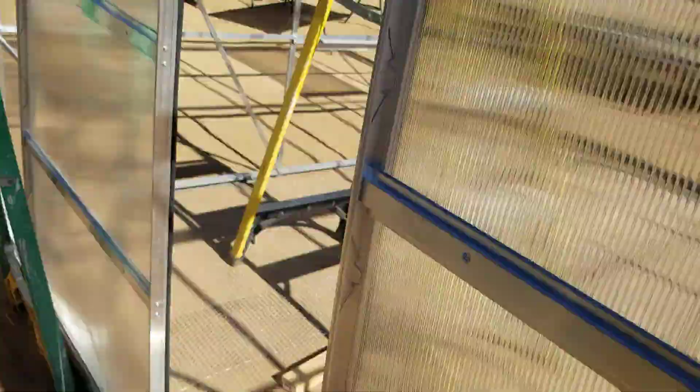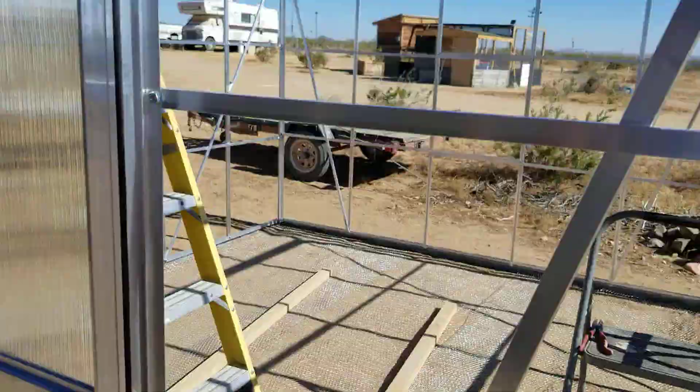Yeah, the doors are in, and they're not bad little doors, as you can see. They have rollers at the top, and plastic guides at the bottom. But with the blowing dirt and dust, I'll have to make sure I keep those tracks clean down there. You can see they're already filling up with dirt and sand, and that will cause the little plastic things to wear.

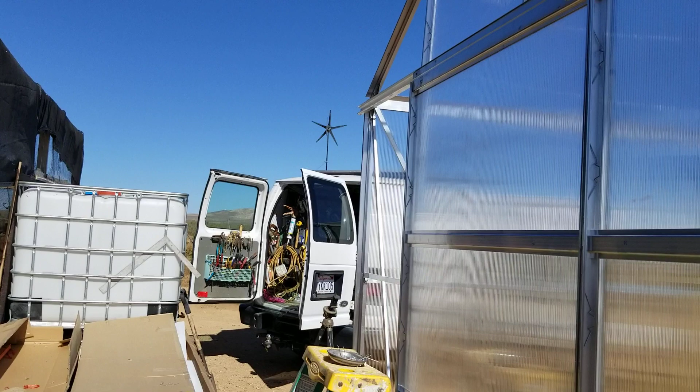So anyway, yeah, I got those in up there, and I'm going to be doing the other side in a little while. The wind just came up, but it's not that bad. It was a little stronger earlier, and I brought my windproof mic out just in case. But then I realized I'm not going to be able to use that when I put this in the holder over there and on the tripod.

But yeah, something got under the wire here and has been doing a bunch of trenching under there. I'm not sure if that was a lizard. It looks like it's probably a lizard because there's no holes that go down into the ground. So I think it's a lizard that's been going under there doing its little tracking through there.

What I'm going to be doing on the next Home Depot run is pick up some Portland cement and mix that with desert soil in a dry mix. Then I'll spread it out here like concrete, give it a light sprinkling with water, and let it set up so it's a really hard floor. It should still be somewhat porous to allow water through, just not easy for critters to dig through.

I hope this wind isn't bothering you. I'm going to move around to the other side, and we're going to get into how to install those little clips.

And they give you loads of them. This is one bag, and that's the other bag there. So we'll do this in a second.

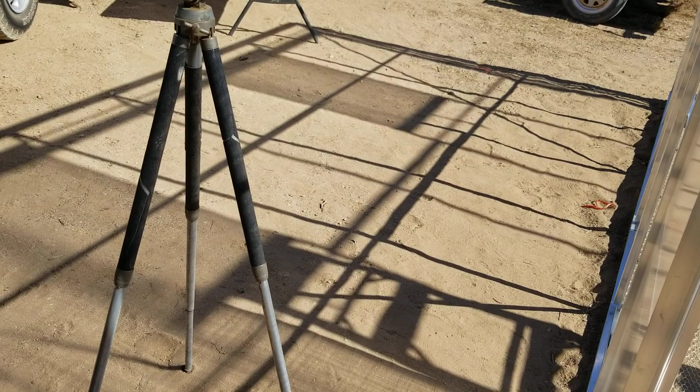I just have one question for everybody out there. I went to my local store here to get some ice and some groceries, and every local store I've seen has signs up saying, due to a national coin shortage, please try to use exact change. Can anybody explain how the COVID virus created a national coin shortage? You'd think with more people staying home and shopping online, things like that, where's the coin shortage coming from? Just curious.

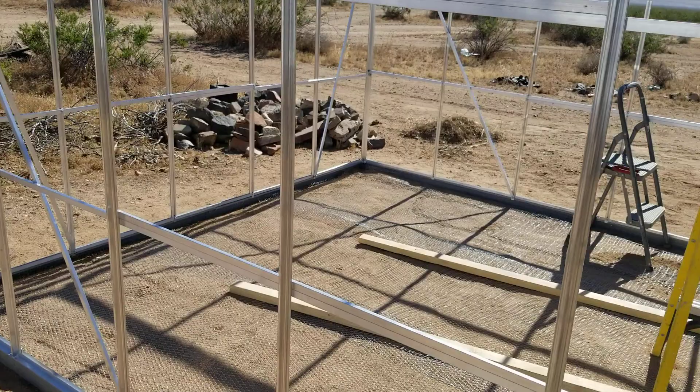Anyway, let me check my list before I go into this next step. Oh yeah, in the booklet, when I started constructing this thing, it says 2 or more people are required for setting this up. Well, there's 3 of us, me, myself, and I, and we got it done.

Remember, I work smart, not hard. So when it came to putting up the top beam, it was pretty easy to figure out. I raised it up and rested it on top of the solid side, the side that doesn't wave too much. Then I was able to go up the ladder on the other side and put one bolt in to hold it, then come back across and put a bolt in on this side, and two bolts on that side, and that took care of it.

One thing in the book that's wrong: it says after you put up the ridge beam, put end caps on it. Don't put the end caps on. I didn't, because it didn't sound right at that point, since those little vent doors have to slide into that top rail, and the top hinge slides in a rail. If you have the end caps on, you have to take them off again to slide those things in. So end caps and things like that are all pretty stuff, you can save that for last.

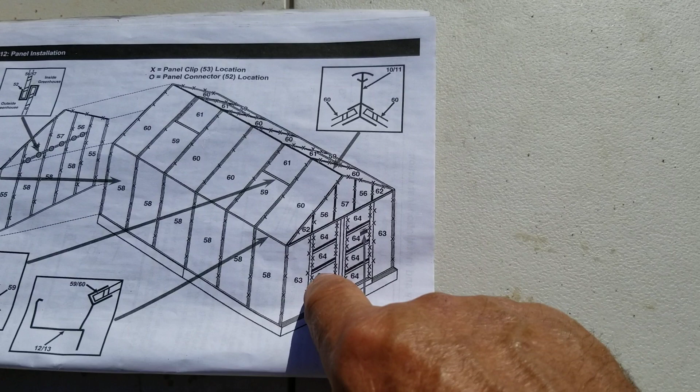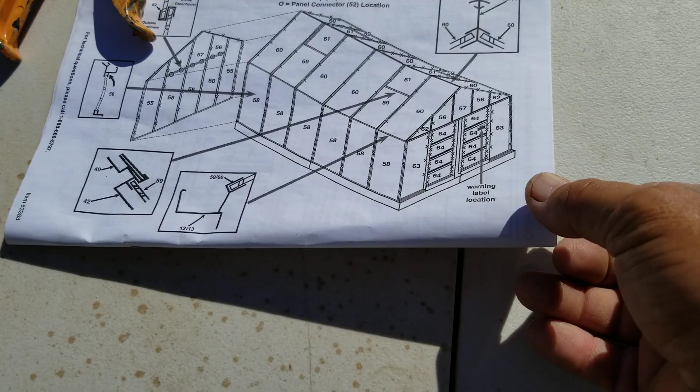I wanted to show you that in the book. It shows all the numbers of the panels, and these X's mean where to put those clips in. It shows there's quite a few clips to put in. Then it shows the part I forgot, how it fits into the slots. Well, I know it now, so there we go.

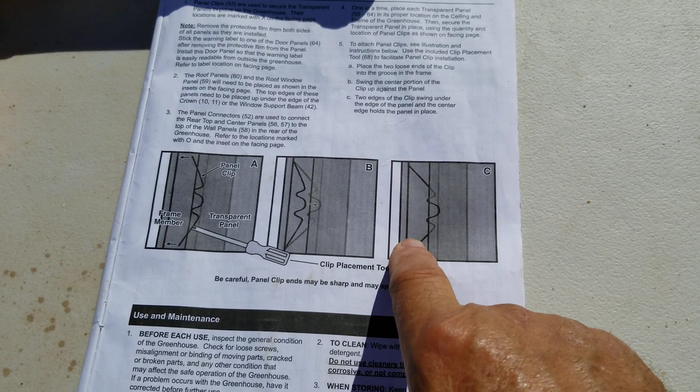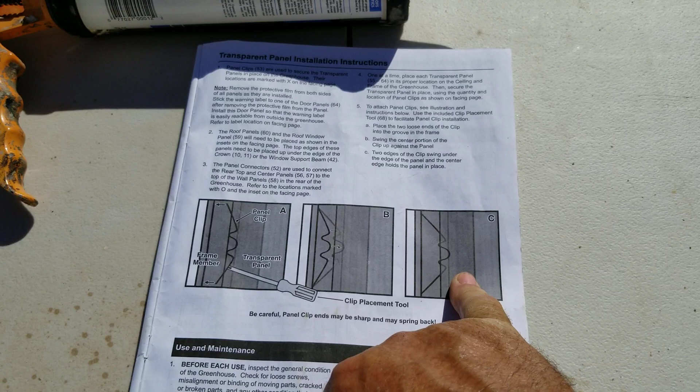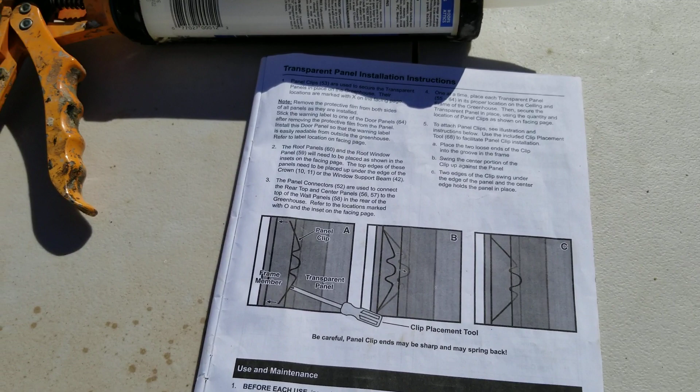Now this is the instructions on what they say for putting these clips in. I'm going to attempt to put one in without putting the camera down, doing it one-handed. This isn't very clear about how it goes. It shows that the springs go behind the clear panels, so that was kind of confusing, A, B, and C. Then they show the tool here pointed right here. Well, that's where you put it to take these clips out. I wouldn't put it there to put the clips in.

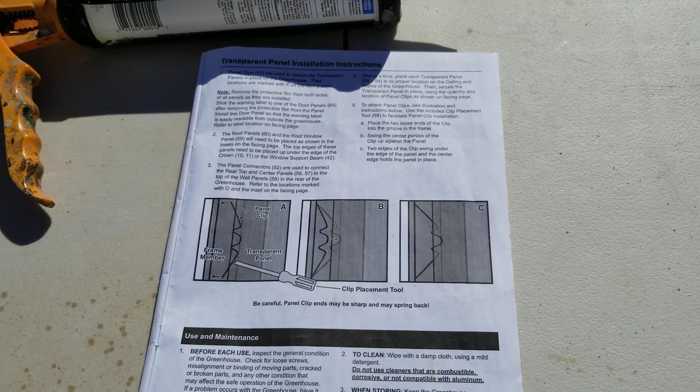But let me show you exactly what I'm talking about. See if I can do this. Now, I just put this one panel in here a little while ago, just so I could show you how these clips work. Let's see if we can do this one-handed here.

Okay, so this is the clip. If you hold it by the center piece here with the two pointed ends kind of pointing back at you, towards the side you're going to put it in. I'm going to put this on the left side, so they're pointing to the left side and towards me. There's a ridge right here on the metal beam, and you're going to put those two points right behind that ridge. Now put your finger right here to hold it in place. As you're pushing, you want to push kind of towards this beam slightly and in at the same time.

And the clip usually slides right into place. So here we go, let's see—it's kind of hard one-handed. There it goes, you see how it just slid into place, but it's not all the way in yet. It's got to go in and clip like that. And then you see these pieces, like the diagram shows, are actually behind the panel, and this part is what's holding the panel. So it's pretty easy once you get the hang of it.